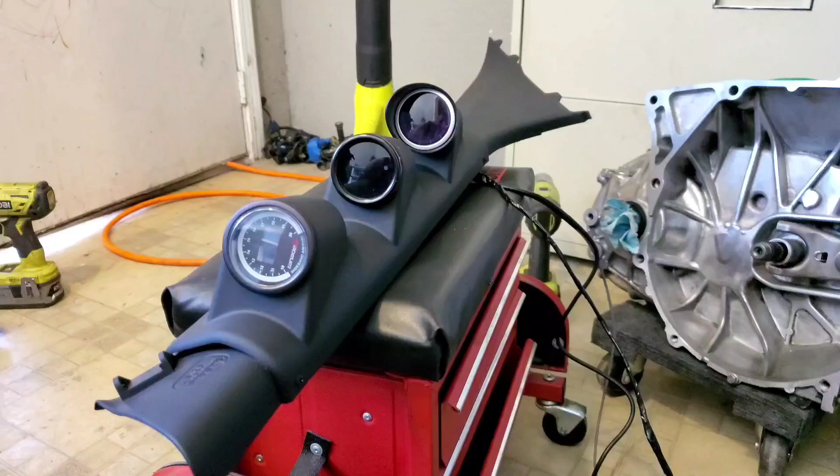We'll leave that one cycling. This one is reading, it's reading the oxygen sensor. Boom.

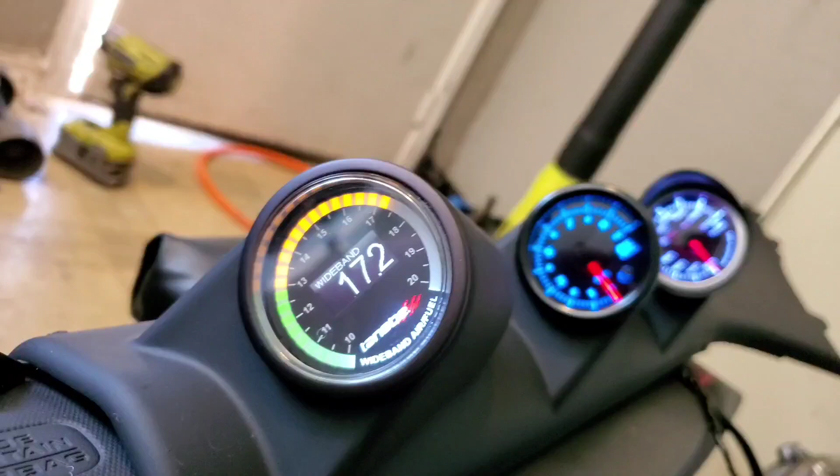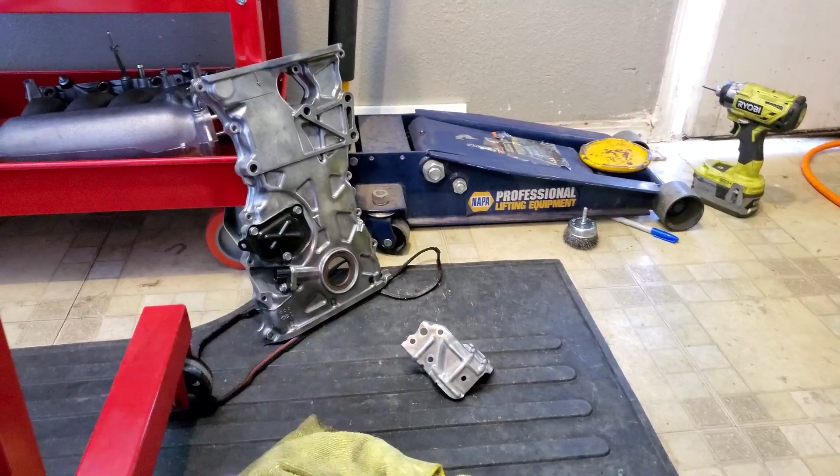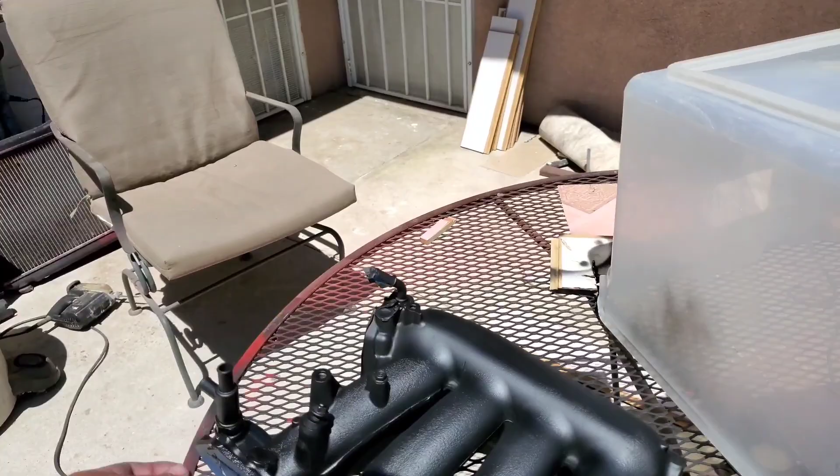Today we're gonna install the sandwich plate on the motor, and we're finally gonna put the seals and gaskets on there. It's still the same day that I made the other video you probably seen yesterday, so I still don't have my Honda bond. But we're gonna put the seals and gasket on this one, seals and gasket on that. We're gonna put the O-ring to the main on the water pump, the O-ring on the pipe, and put these back onto the wiring harness. I still have the intake outside drying, we'll wait for that. I'm pretty much picking up where I left off. We might install the injectors on that. Let's go ahead and get started.

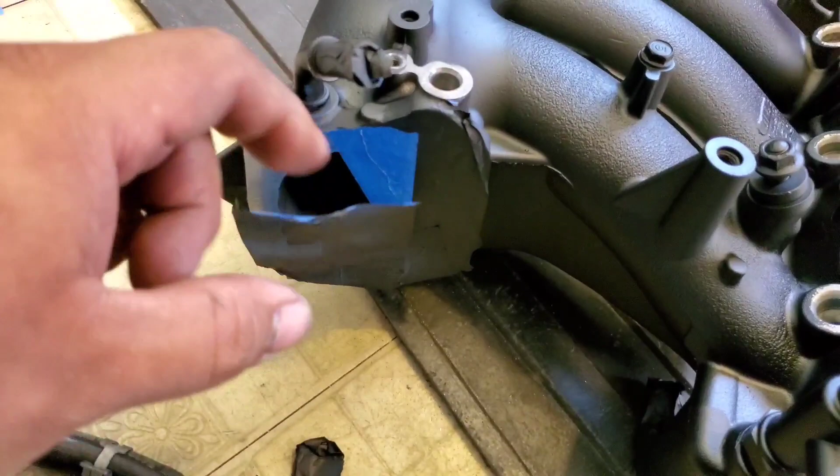Alright, here I have the intake. You guys want to see how satisfying this is? Look at that. This one's going to be the best one. Woohoo! It's like opening up a new present.

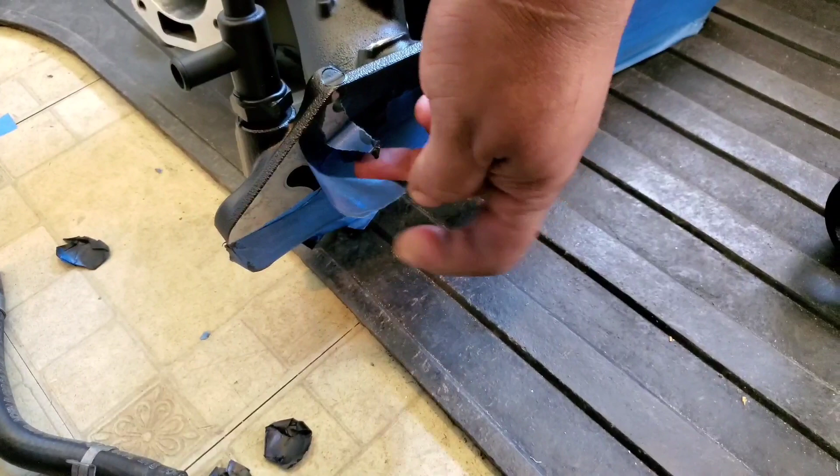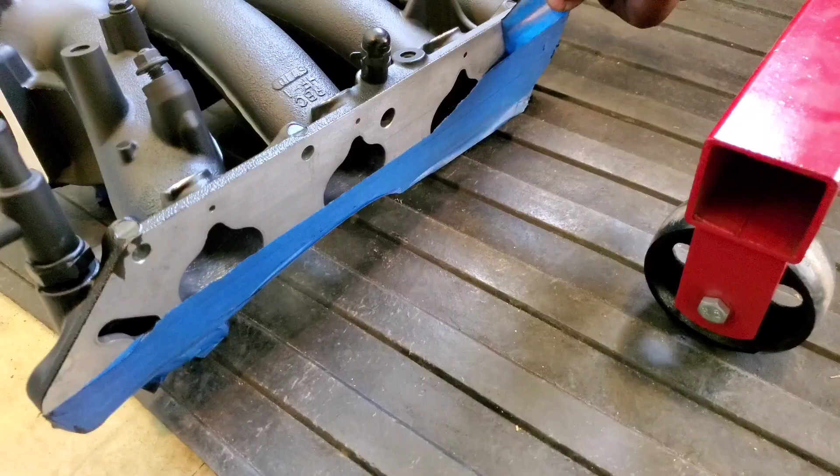Alright, there it is, super nice and clean, shiny, except for the paint because it's flat black. There it is. We're going to grab the injectors that I just seen. Oh, here they were.

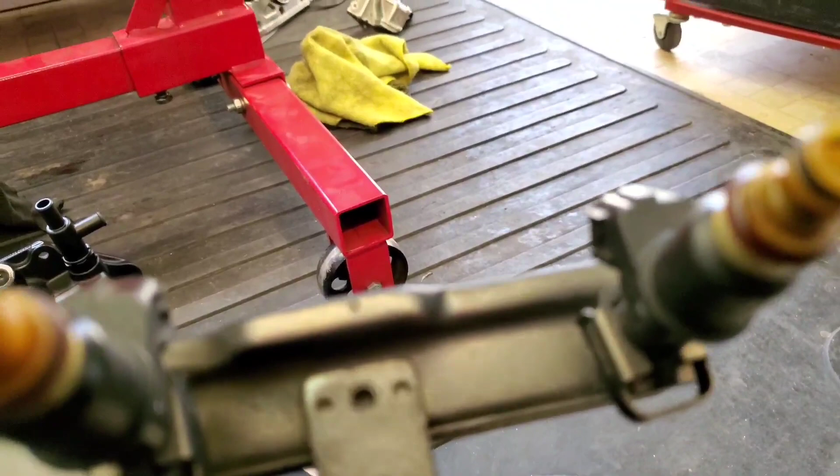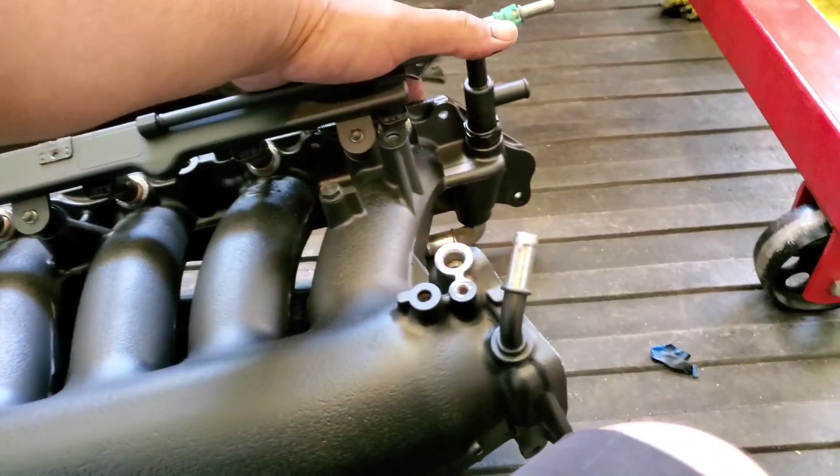Alright, make sure there is no debris on them. Cool. Now we're going to first take off these nuts and go ahead and insert them. Try to press them in nice and evenly down without breaking the goddamn injector. Alright, there it is, nice and mounted, nice and sealed.

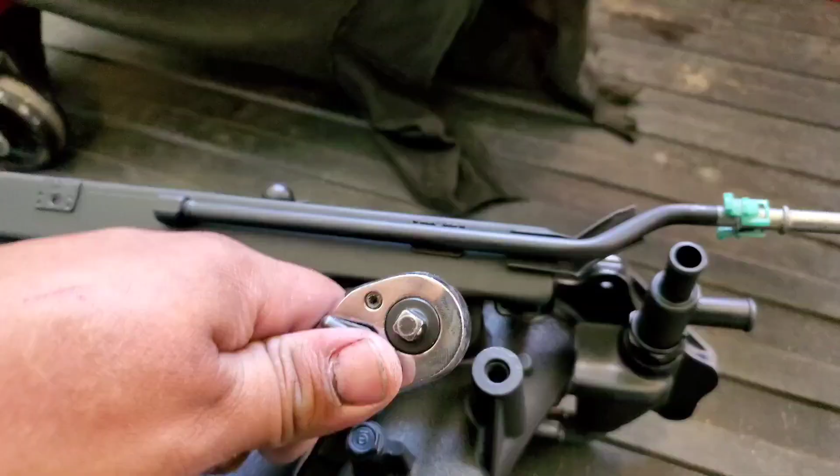Now we'll put these nuts back onto place, screw them down, and then we'll secure them. And these are a size 12. Perfect.

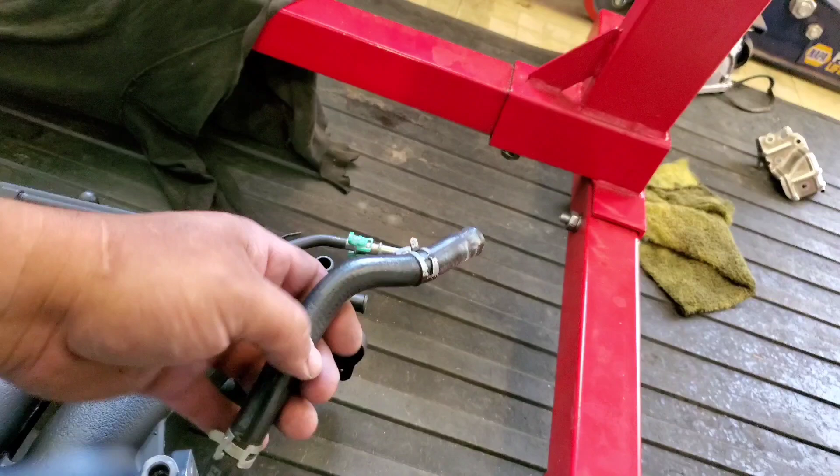Sweet, that looks nice and clean. Let's go ahead and put this hose back into place. Is it this way? Yes, this way. Put the manifold pressure sensor back in. I should have painted this one black. Let me spray it real quick.

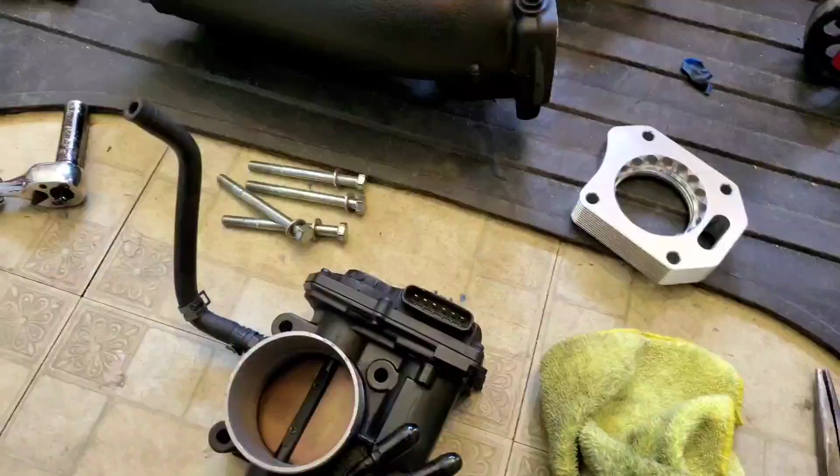Well, since we're waiting for that spray to dry, we're going to go ahead and install our throttle body and our spacer as well. So I'm going to just mount this onto this. Oh shit, forgetting something, just clicked me. Oh, that effing gaskets.

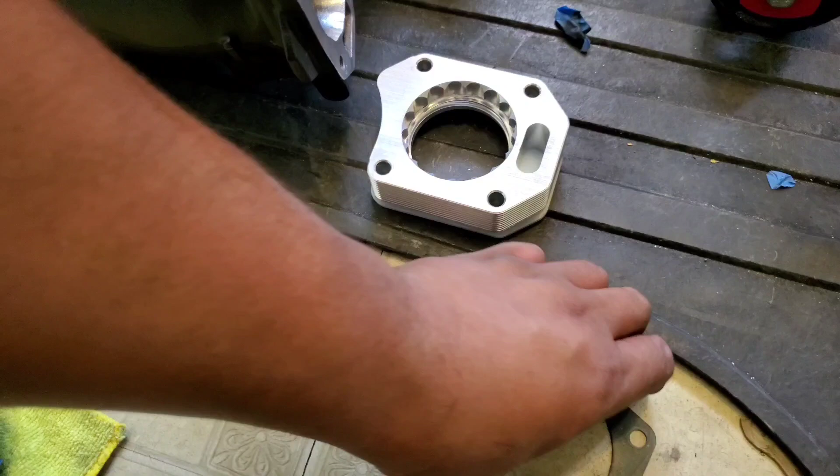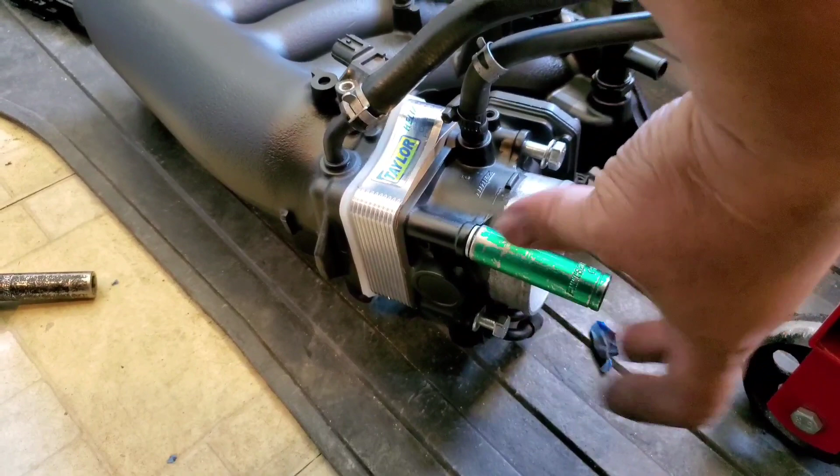Alright, so the way this is gonna go is I have my K20 gasket right there, J35 right there, J35 on top. Alright, and there it is. These are a size 13. Go ahead and square these out.

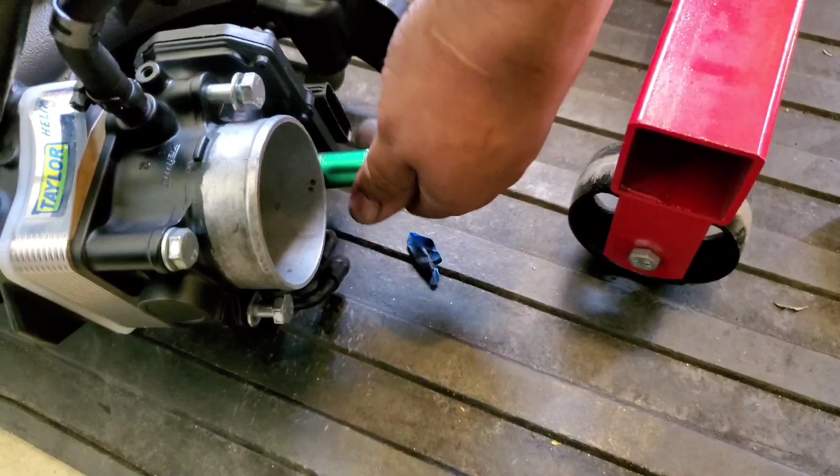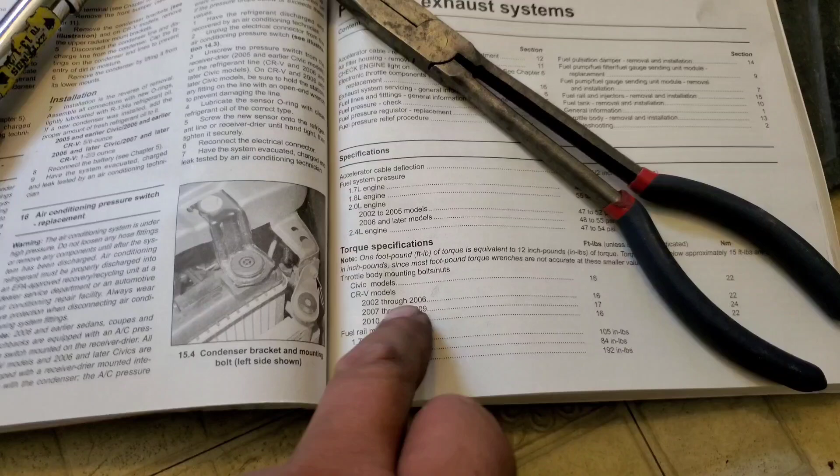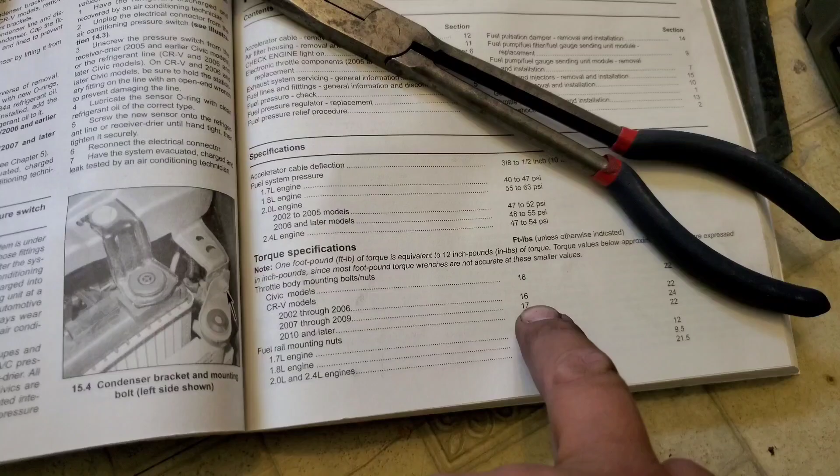Go ahead and tie these down. I bought this book just for the torque specifications. Here, the throttle body mounting bolt nuts - mine's an 06, but this one goes from 02 to 06. This one is my model 8th gen, even though it doesn't have 06, mine is an 06. But anyways, foot-pounds is 17, unless otherwise indicated.

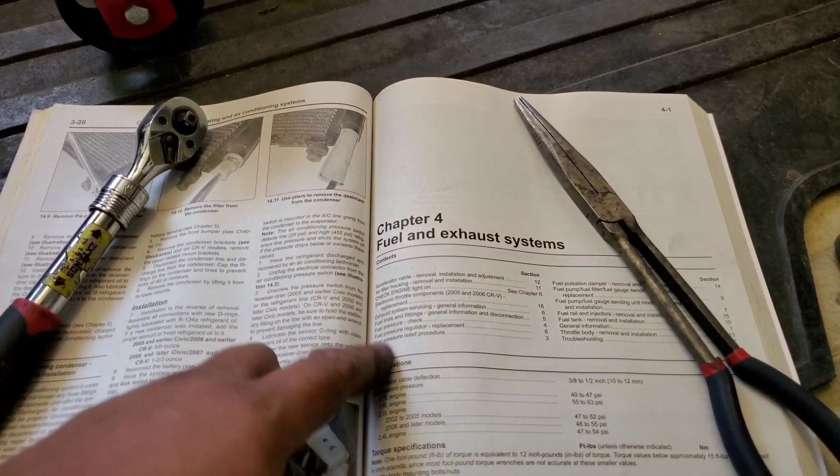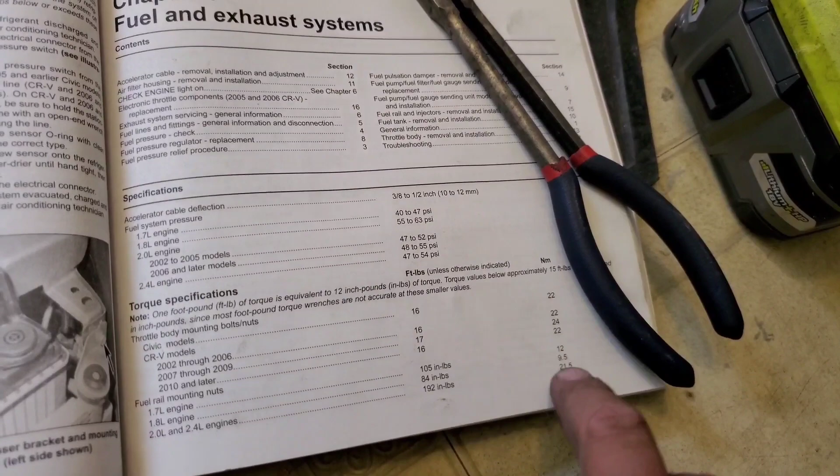So it is 17 foot-pounds. So we're going to go ahead and torque these to 17 foot-pounds, and then we'll torque these to fuel system pressure 2.0. That's the pressure system, fuel mounting nuts, here we go, 2.0. You gotta calculate this to 12 inch-pounds, which is approximately 15 foot-pounds. I think that's the number, not too sure, but we'll see what's up.

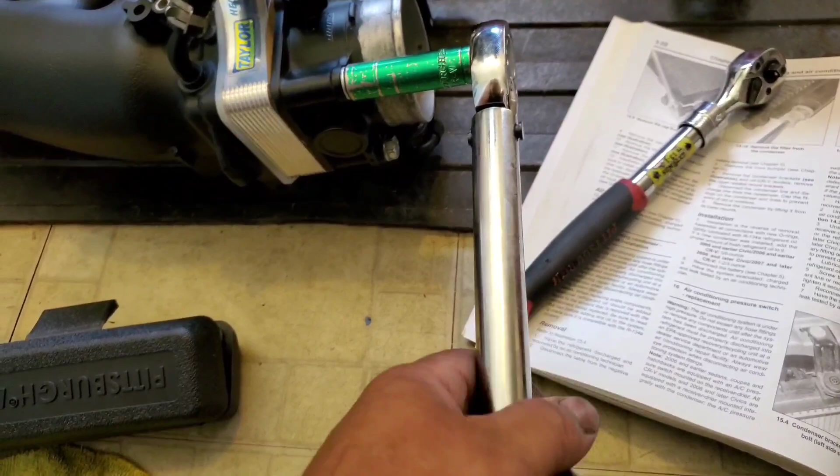Alright, there we have it set to 17, and I'm gonna go ahead and torque these down. I'm probably gonna need both hands and see if I could do it single-handedly. Probably not, but they're all set. Now let's go ahead and do these.

Alright, and the fuel rail is set to 21.5, and there it is, 21.5. So I'm going to go ahead and tie these down. Alright, and they're all torqued down.

Perfect. Now let's go grab that little bolt and stick it in there. This is ready to just stick to the side till we're ready to install it. Alright, there it is. Now we'll go ahead and secure it down. Perfect, now this is ready to sit to the side and install when we're ready.

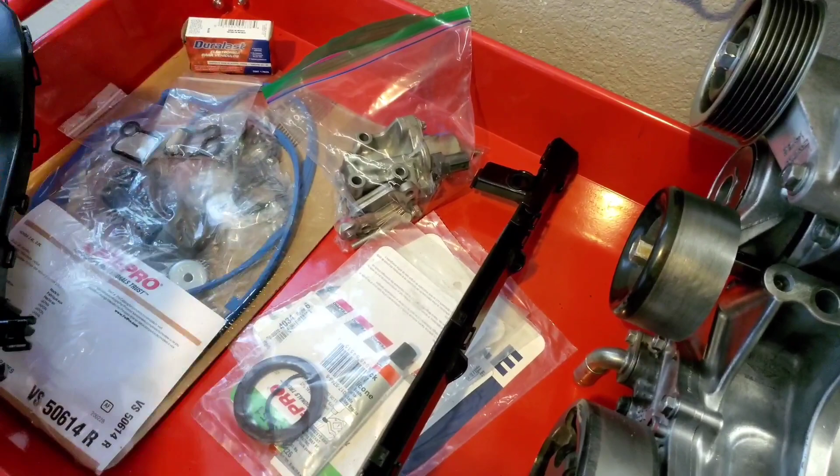Alright, here's everything we're going to install. Here's that plastic cover, this one right here. This is from the old one. This one's from this one here. For the coil packs, we're going to install that. We're also going to install...

Here's the front main seal, and there's a little bug in there, and there's this little seal here, that one right there. Comes with RTV black silicone, but I'm waiting on the Honda bond. I got that shit right there too. I'm waiting on Honda bond.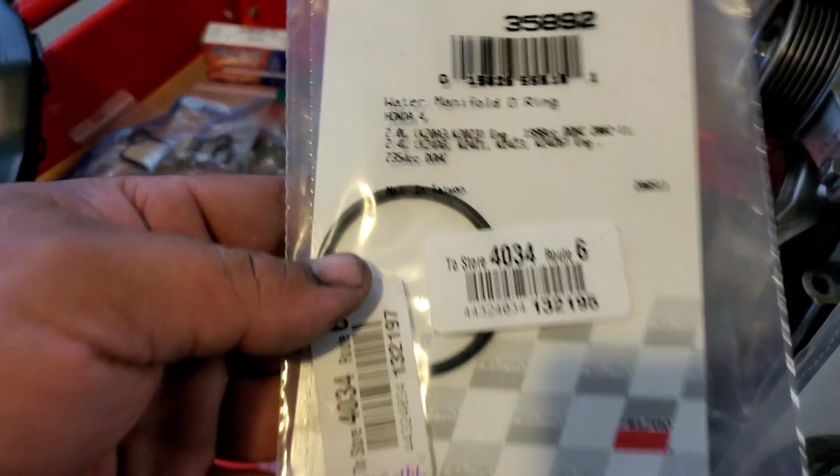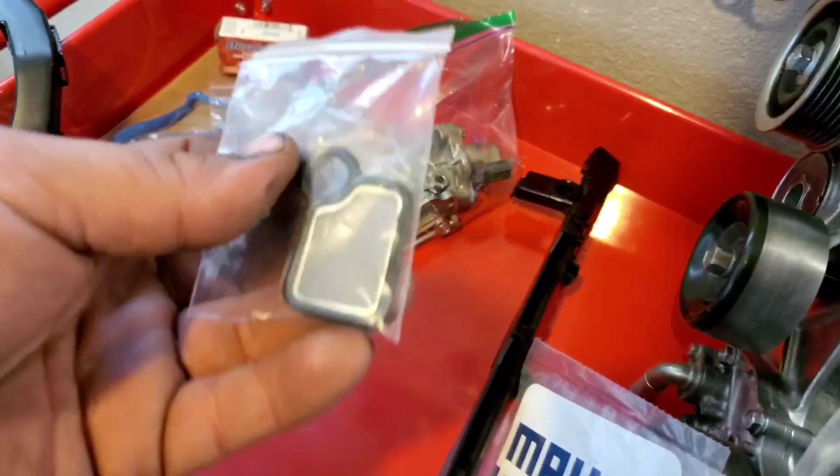Here is the water manifold O-ring for this one here. Here is the coolant outlet pipe seal right there. Here is the VTEC, or actually VTC. Here is the VTEC screen.

Here is the valve cover gasket with new grommets for the spark plugs. Here is the knock sensor. We're going to be installing all these items today.

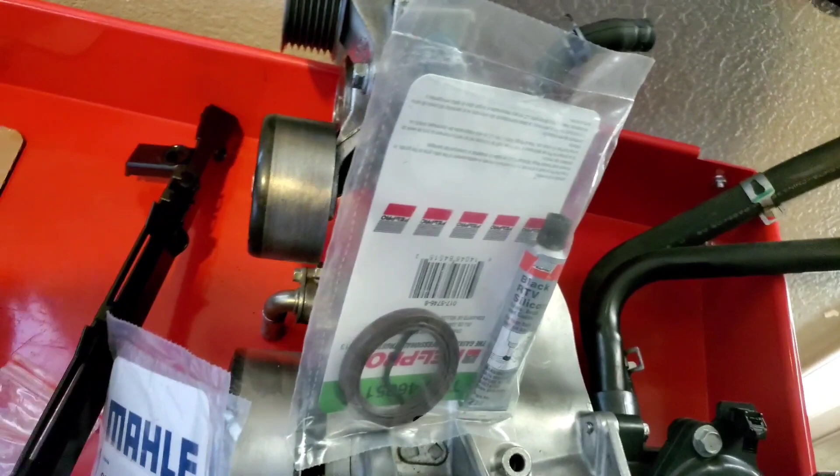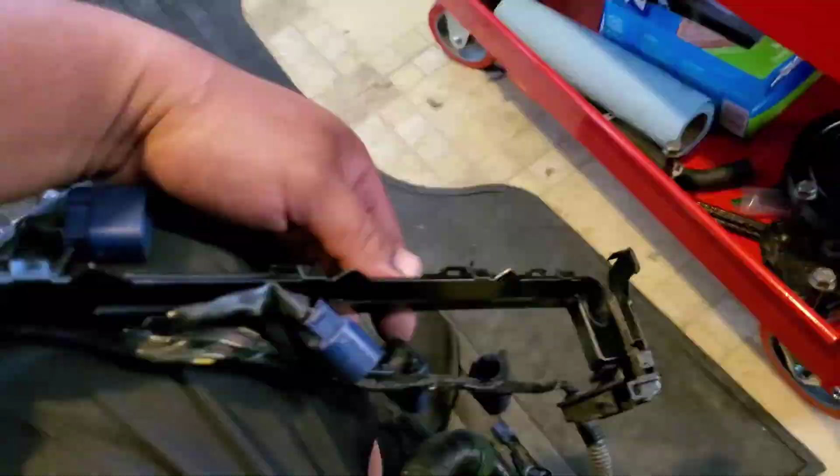I think we should start with the wiring harness to get these big pieces out of the way. Let me grab my chair and post up. Grab my harness, here it is. I'm going to go ahead and insert this and put it in the way it should go. This is going to be the back piece, so it lays down just like this. Alright, there it is. Now we're just going to close this down and close all these little clips.

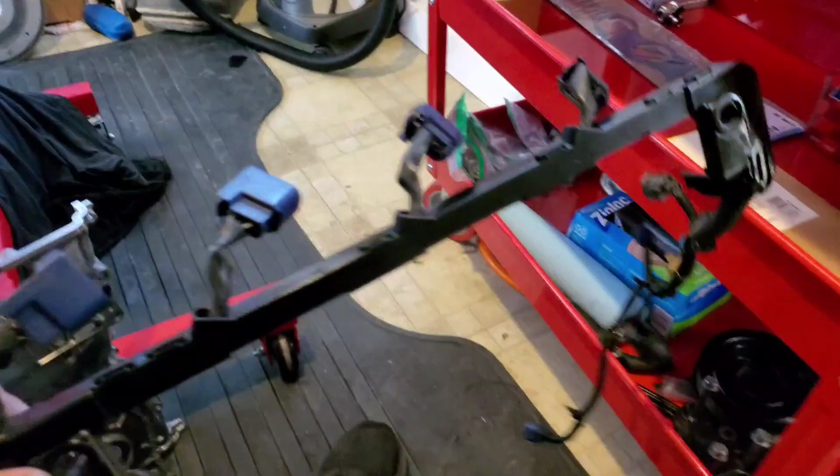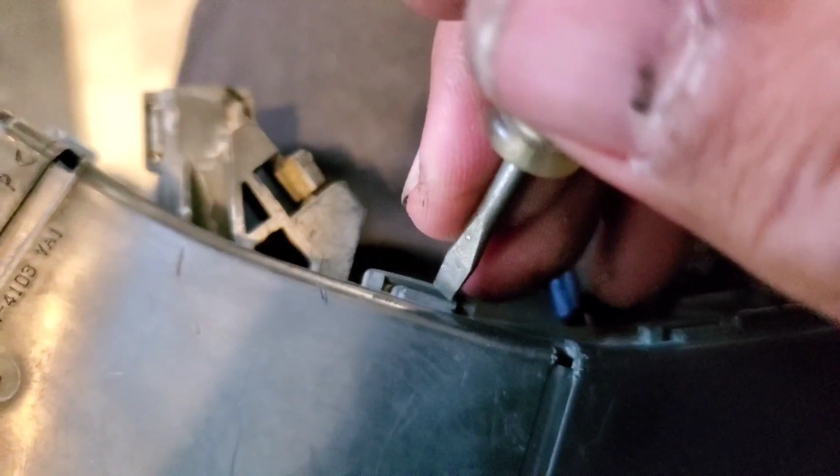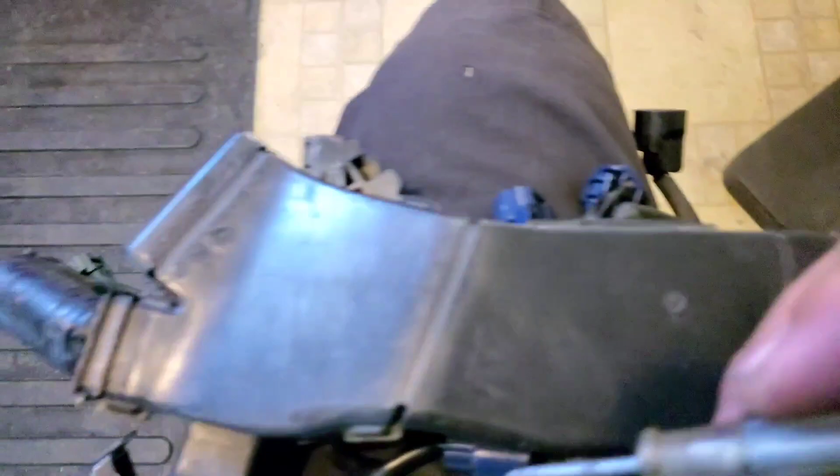There is the coil packs. These are the sensors that go to the front and the VTEC. Now let's go ahead and remove this one from here. I'm going to need a small flathead for this. Pop these open right through here, just push down. You're going to need both hands to do this to pull up, but we're going to start from this corner and move ourselves this way. Alright, there's the old case.

Here's the new case. Wire harness looks brand new now. Now that we got this out of the way, let's go ahead and shove this somewhere in the corner. Right here is good.

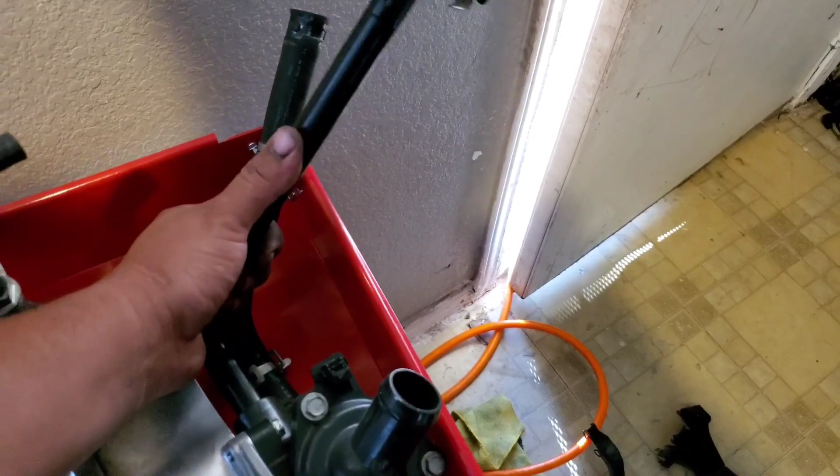Let's do this water pump next. Go ahead and flip this around. Actually, let me take this one off from here. Swivel it back and forth and pull up. Alright, there's the O-ring. Use this little tool to hook behind it and pull it out, then put the replacement on, just like so. Oh, I'm going to need both hands. But just like that, it's out.

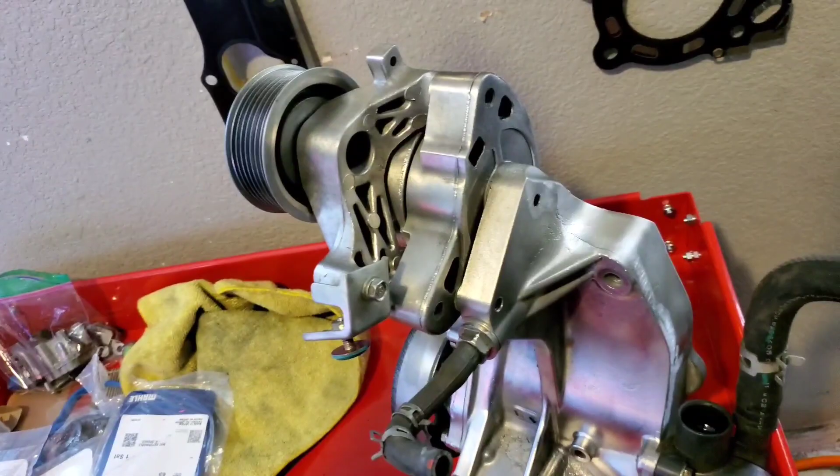Now we'll go ahead and install the new one. I cleaned the bottom surface and installed a new ring, and there it is. Nice and perfect. I think what I'm going to do is leave this out, and when I'm ready to install it, I'll install it. That way it's not moving back and forth. I know it won't mess up the seal, but regardless, fresh seal. Let's install it when we install it. That's basically it. Let's move on to the next one.

Manifold O-ring. Alright, here we are, same process. There it is. Matches up, beautiful. Let's go ahead and install the new one. And boom, look at that, perfect fit. When I first took this one off, it was already a little too big. It expanded, you can tell it's a little bit bigger. So that's why we are replacing it.

Sweet, there, brand new seal. I still need to clean this up a little bit more so we can install the Honda Bond when I get it. Alright, surface is nice and clean. New O-ring.

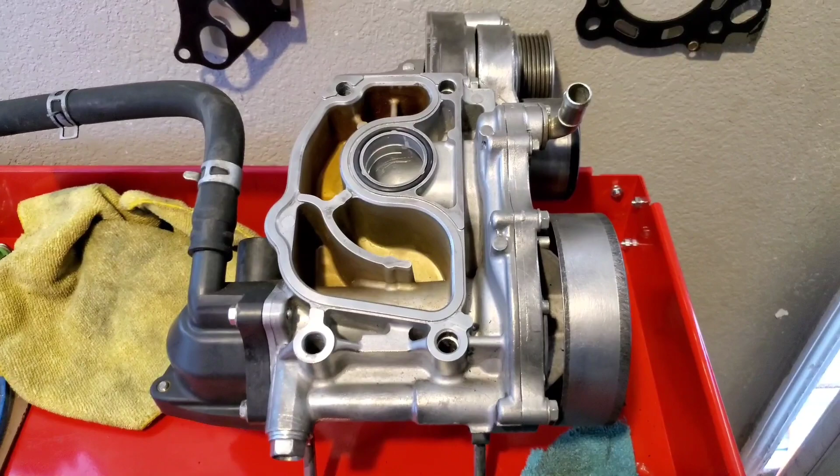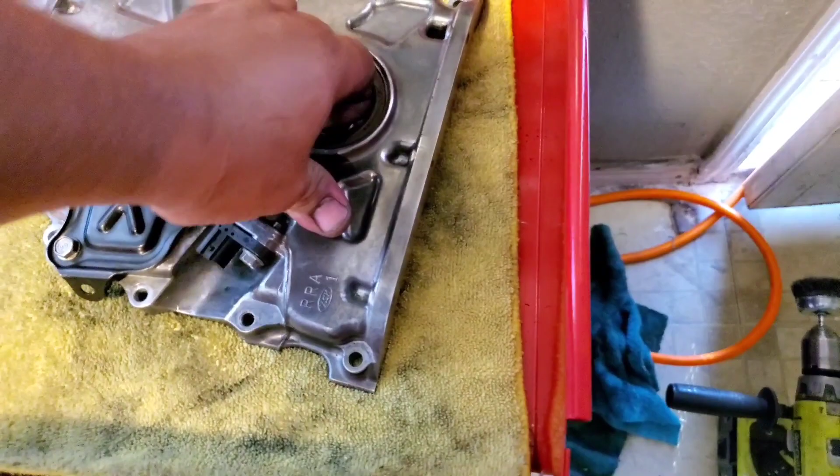These are all tied down already. This one's ready, let's get this one out of here. Alright, here we have the front case. Let's go ahead and take this one off. Might have to beat it a little bit from the rear.

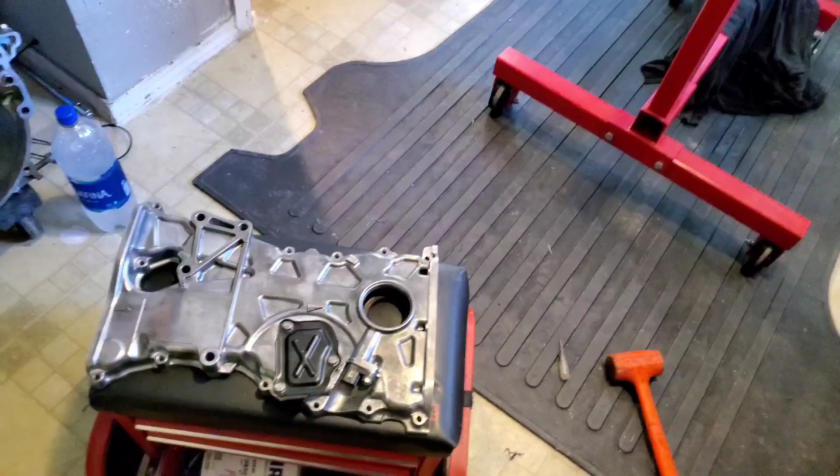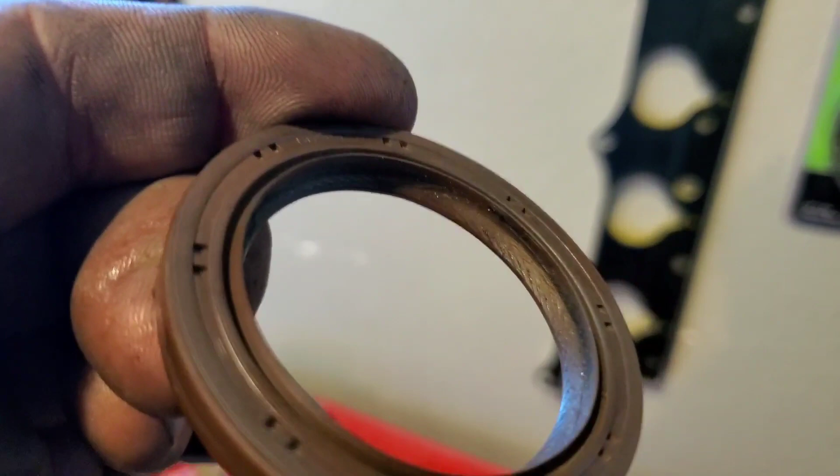Alright, I actually have the perfect socket to knock that out, so I'm going to go ahead and knock it out. I couldn't get this one out forward, but backwards I was able to. There it is. Now we'll just go ahead and clean this surface here. It still looks pretty good, but it has some cracks right there, so it's a good thing we're replacing it regardless.

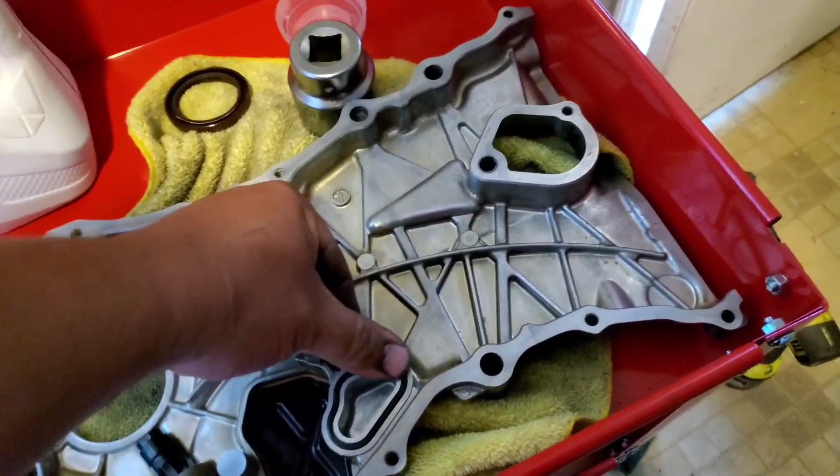Go ahead and clean this up. Alright, we'll grab our part here. Let's go ahead and insert this little ring right in here. Perfect. Come on, you. Alright, perfect. Now let's go ahead and insert this new one.

Grab a little bit of fresh oil and just rub it on the seal. Oh, slippery, that's essentially what we want, for it to be slippery, so it just slips right in. Looks like we might have to beat it. But first we've got to line it up straight so it goes in evenly. Yep, I'm going to need both hands. Alright, there it is. Both seals are installed. Let's get this one out of the way.

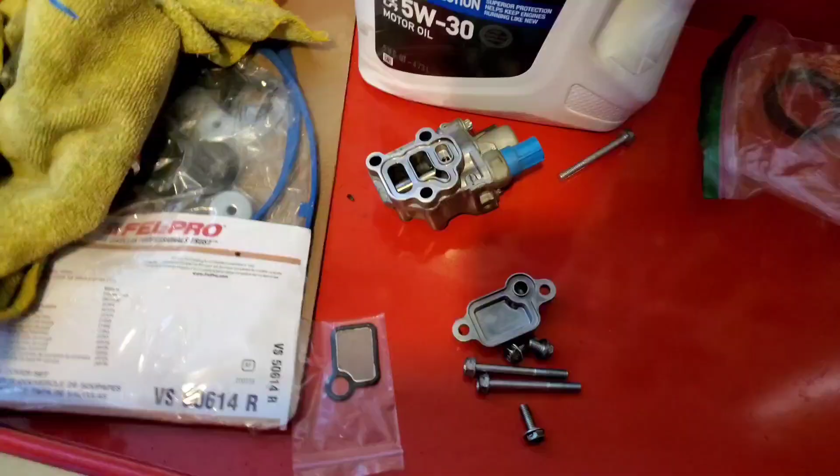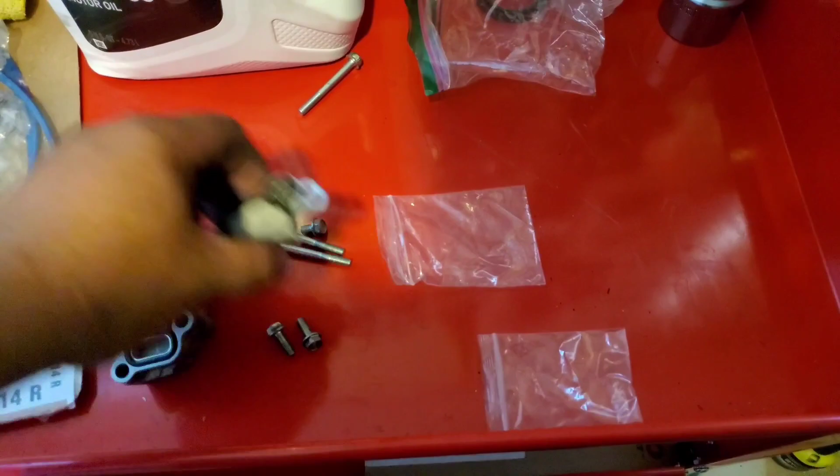Now we're going to do the VTEC solenoid and the VTC. There it is. Go ahead and take these filters out and put them right in there. Alright, there it is. Let's go ahead and mount these onto the motor, and get these out of the way.

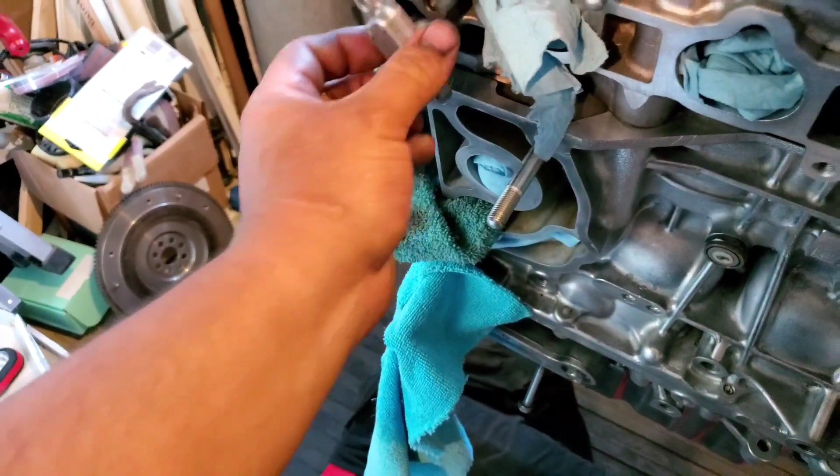This one's going to go right in here, just like so. Here comes the broken knock sensor. Sweet, alright, and there it is. That's trash now. Let's go ahead and insert the new one.

And we'll secure that down. Alright, and there it is, nice and secured. Alright, next thing we're going to do is go ahead and replace the

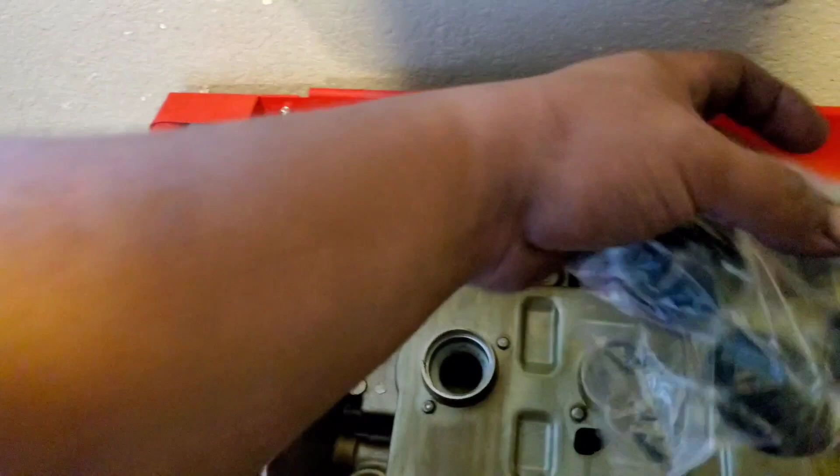seals and gasket on the valve cover. Alright, I got the inners knocked out. Flip this around. Alright, and this is the full kit that comes with the grommets there, the grommets on top, and the gasket. So let's go ahead and put the gasket on first.

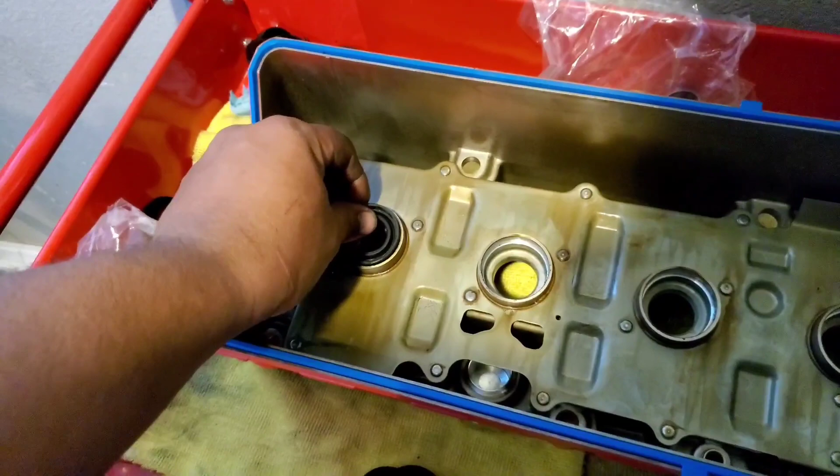Alright, this kit comes with 2 different sizes. You just have to match the ones that you have to make sure you have the correct ones. And now we're just going to go ahead and insert them, just like so. Perfect, now the other one.

And you just want to push that as far down as possible as you possibly can. There it is. Next one. And I'm going to just mount this one here. Let's go ahead and press this one in. Alright, and there it is.

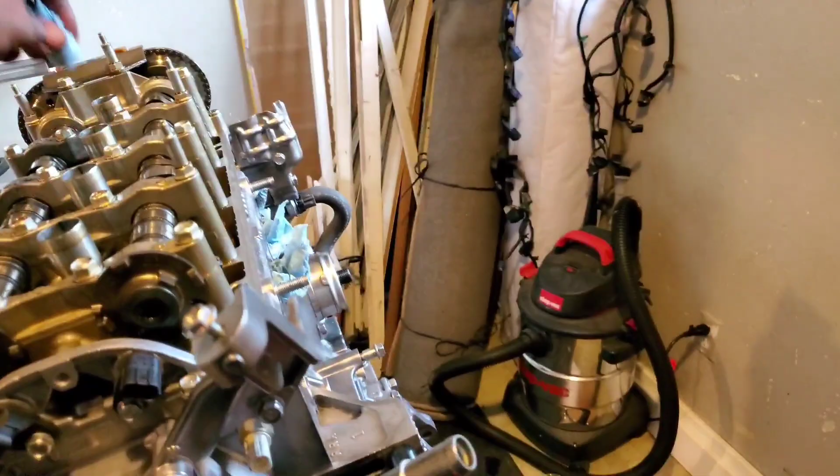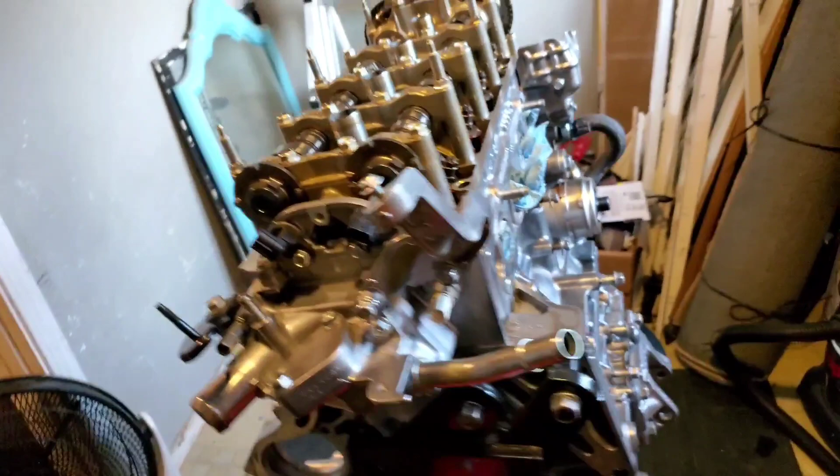Now I'm going to just go ahead and mount it on top for now, until we get the Hondabond, so we can put it here in the corners. That way we have no cracks or leaks that like to crack right where it bends. Here, here, here. Maybe not there, but here, and here, and here, and here. Anyways,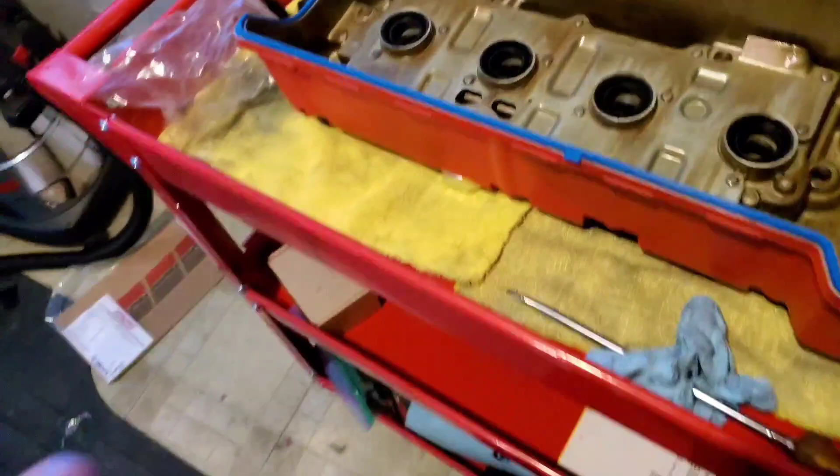Yeah, and I think what I'm going to do before I end this video, I'm going to go ahead and just sand the Honda words down real quick. Kind of started already, but stopped. Alright, and there it is.

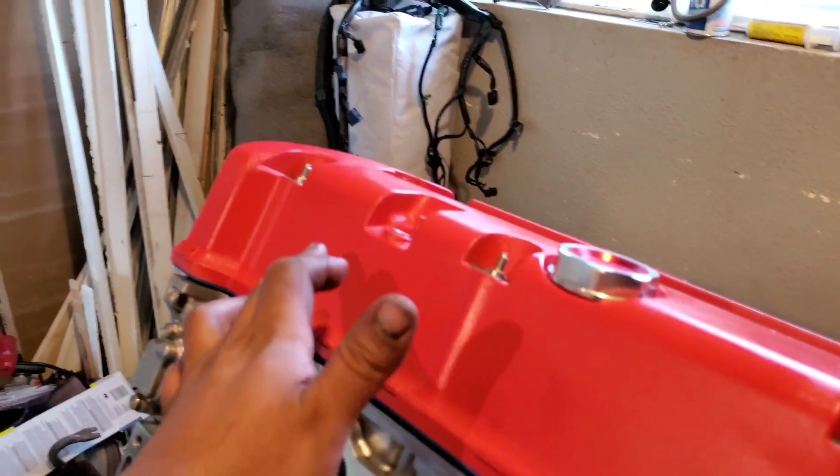Check that out, red chrome accent. Just did it with this wire brush. Just have to be super, super careful, make sure you don't scratch up the paint. I got my fingerprints on it already. Damn. It is what it is. Sucker's not gonna stay clean for long.

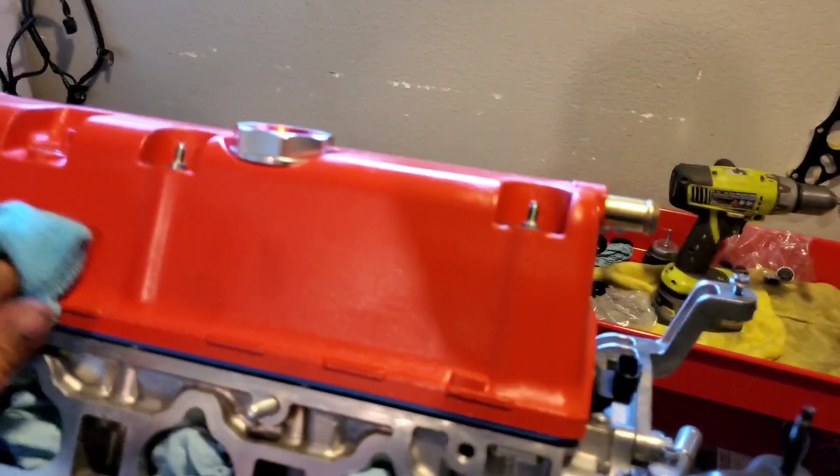And it came off, sweet. Sweet, sweet, sweet, but I think that'll do it for now. Install this, install the VTEC.

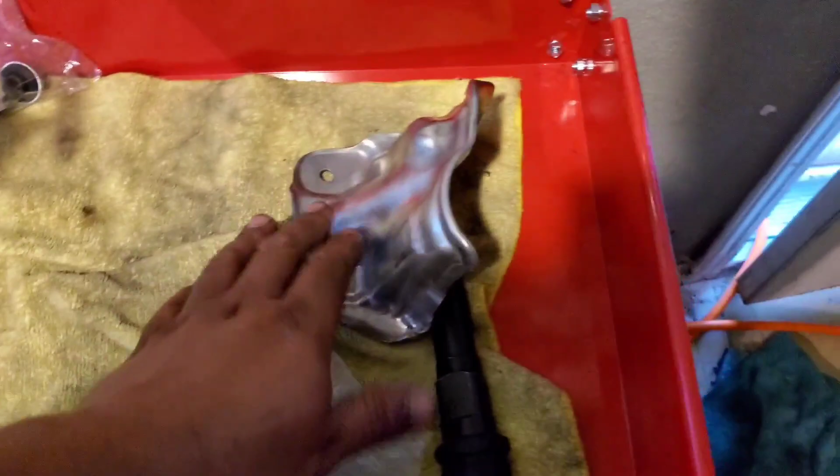I know I wanted to install a sandwich plate, but let's do it real quick. Alright, so I was looking at something. I wanted to put the heat shield as well, but this heat shield's kind of being in the way. So I think I might have to fabricate this.

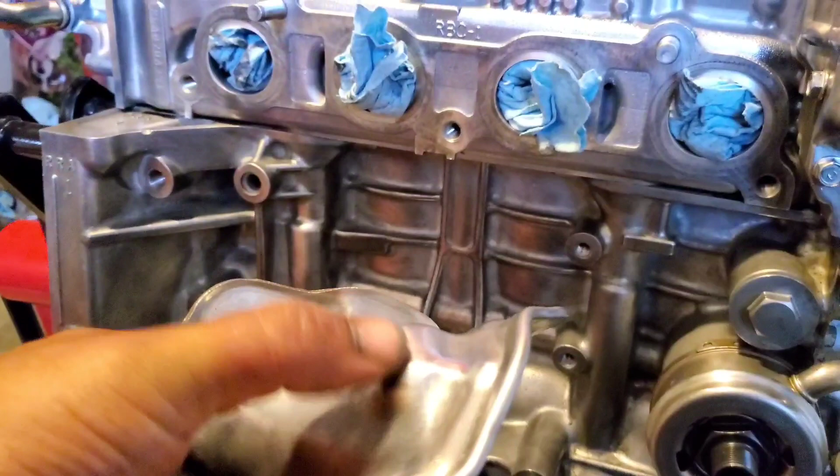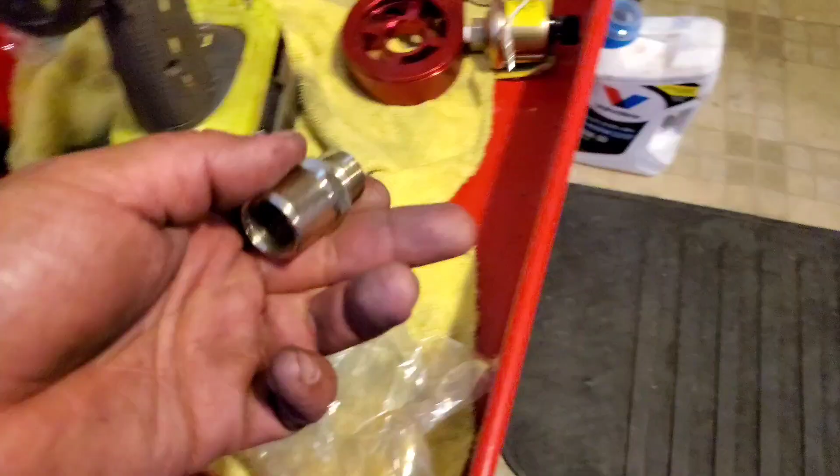If anything, I think I'm gonna just chop from here, so that way we get this clearance out of the way. Because the sandwich plate is going to take quite a bit of space. It's going to go right here. Go ahead and mount it on. Comes with these 2 adapter screws.

Ours is the 20 by 1.5. So this is going to go here. It's going to go right behind it, like so. This is where the intermediate shaft is at. It's gonna have to go right here.

I don't know, if I want this installed, I'm gonna have to figure out some way. Most definitely. Yeah, I guess we'll just wait for next time. I guess that'll do it for now. Anyways, thank you for watching.

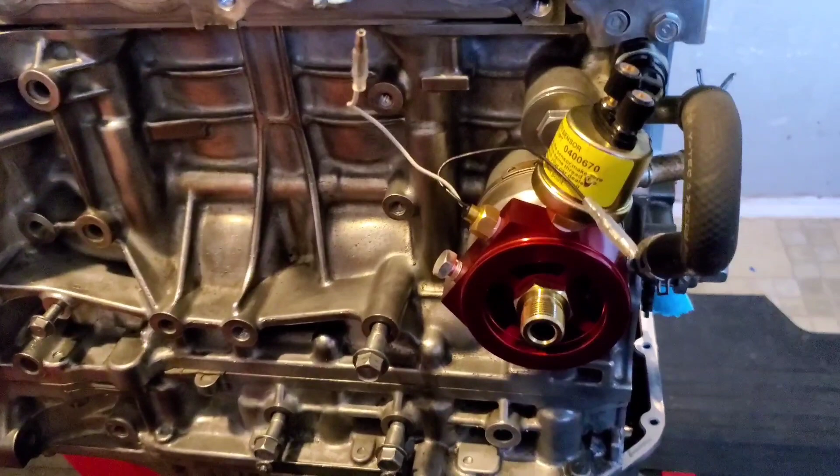I went ahead and cut this and I mounted that sandwich plate on there. I went ahead and switched these around, that way this one is pointing this way and this one I'm able to route this way, like this. Looks like it clears the crank

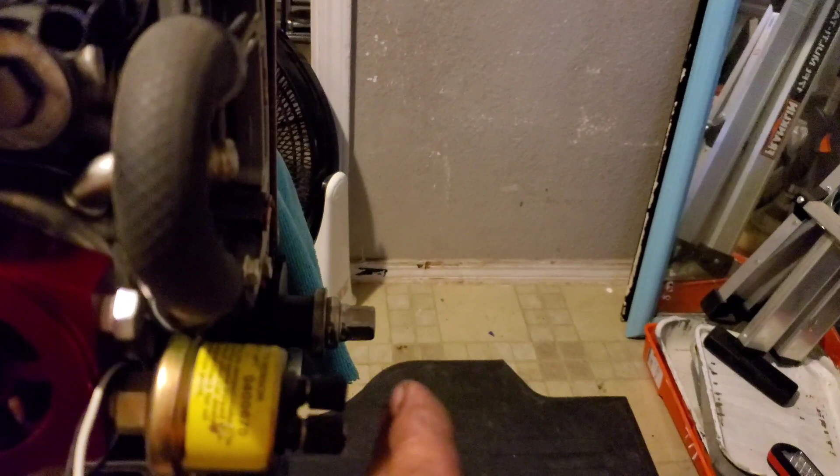bolt, so hopefully we don't hit anything. We'll just see until we get it in there. We don't know, but I cut this so we can clear this, and now we have access to our sandwich plate. I have the intermediate shaft here. I thought it was gonna hit. Looks like we're good, looks like we are golden.

So that will finally do it for today. We got a lot done. Waiting for the Hondabond to get here so we can complete this motor. Waiting for the clutch to still get in here. Waiting for the oil pan to still get in here. Waiting for 3 main things to get here so we can finish this.

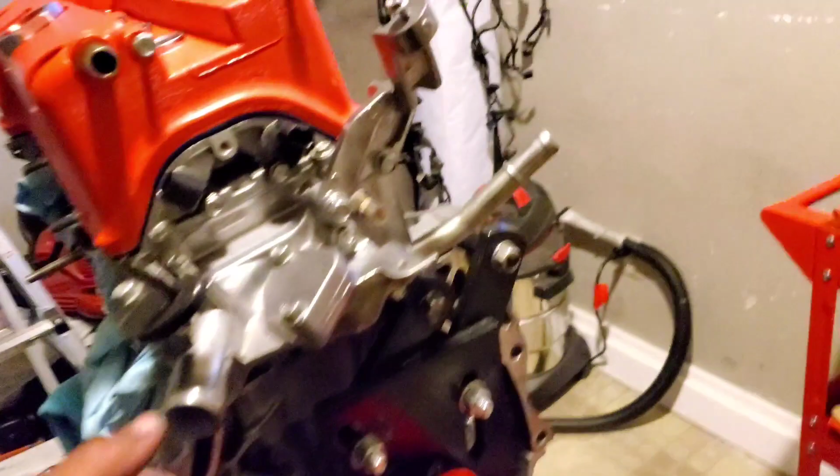If anything, I think tomorrow, Monday, today's Sunday, I'm just gonna call Honda and have them order, or have them send me over some Hondabond over to work, to my location, to the lot. And that way, because I think the oil pan is getting here tomorrow. So I just need the Hondabond and the clutch.